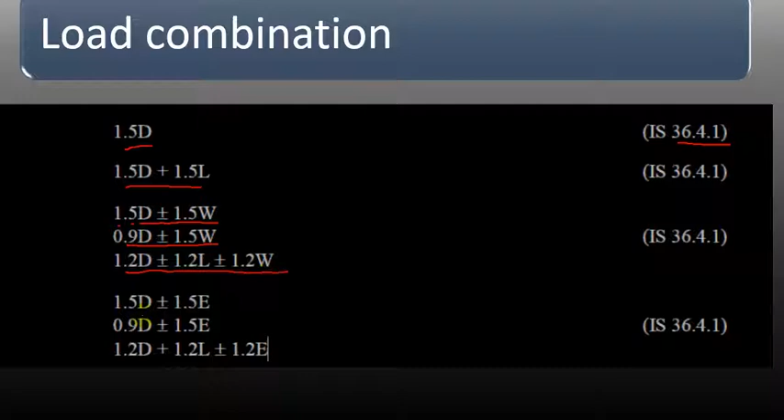Alright, beam design in ETABS. The first thing is you need to know about load combinations, which can be read from clause 36.4.1: 1.5 dead load, 1.5 dead load and live load, dead load and wind load, dead load, live load and wind load. That's all. This is earthquake load, which comes under the seismic part.

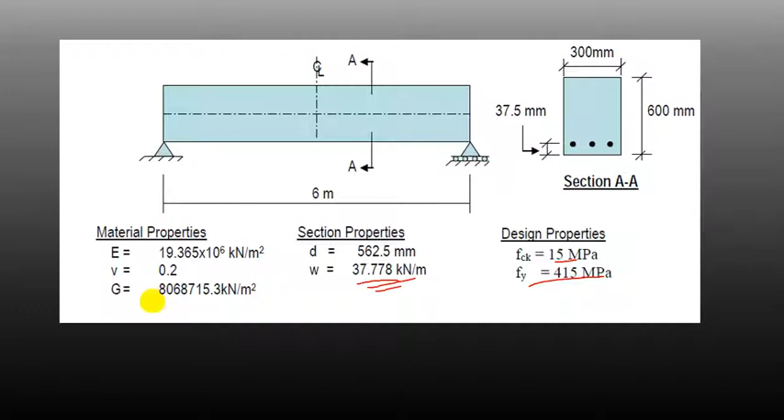Alright, this is our problem. The length of the beam is 6 meters, the section size is 600 by 300. The first thing is we're going to get into ETABS, and the fck is 15 megapascal. The load is 37.77 kilonewton per meter. This is the shear modulus, this is the elastic modulus.

Get into new model. I'm going to pick this option here, and I say that the length is 6 meters, given in the problem. We don't need this grid, but the number 2 will be better. We don't need this thing, but just 2 stories. Don't care about these numbers, okay?

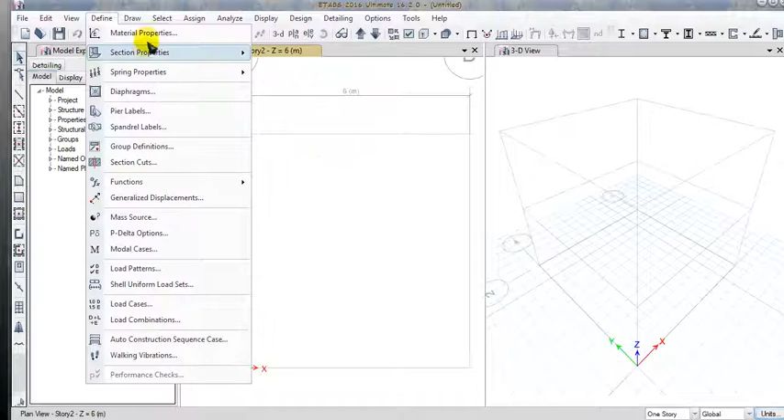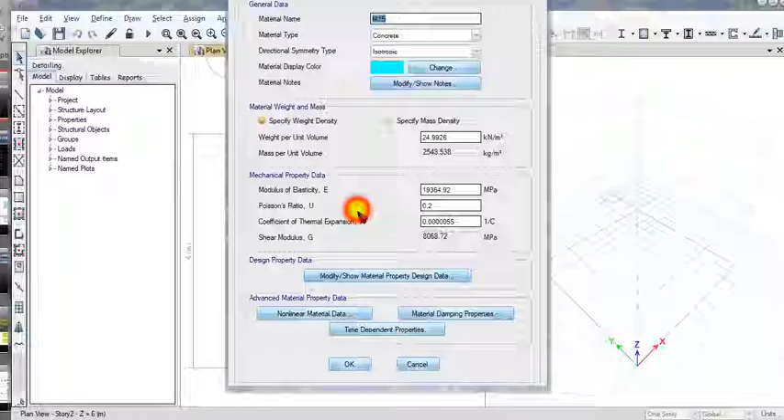The first thing we need to define is the concrete and HYSD. Just get into the state, country, concrete. The grade is M15 based on this problem, and the HYSD is 415. Now the settings should be changed. Just assume that this value is 8068.72. Coming to the slide, 8068, approximately that's correct. Just hit OK, then get into here and make sure that this is 15 megapascal.

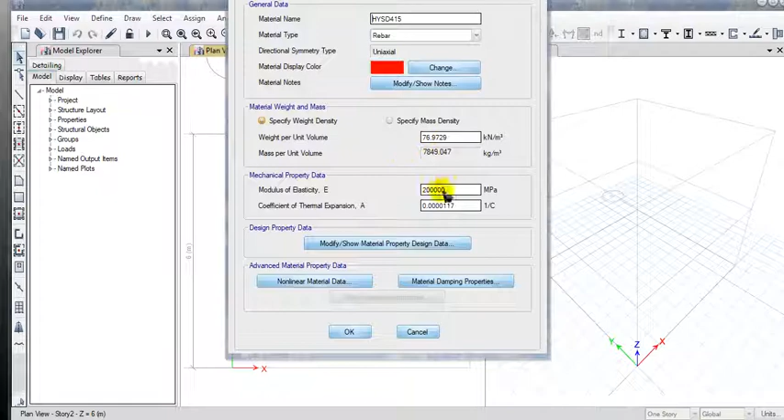And also we need the rebar. Picking up here, rebar grade is 415. The rest of the things I'll leave as they are. Just 415, it's okay.

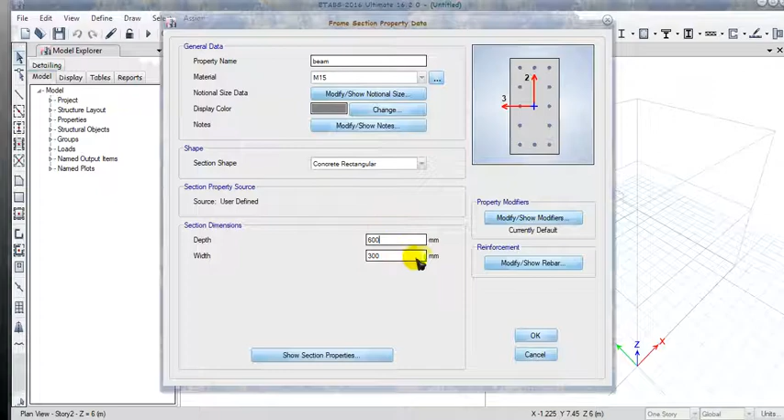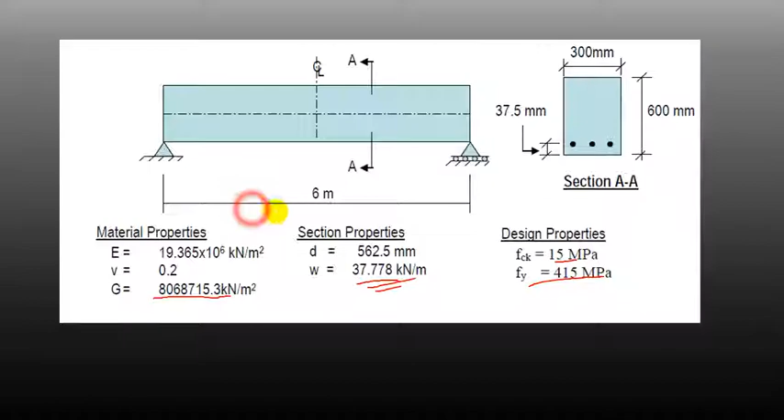Now we need to define a section property, a concrete frame section, and add a new property here. Get into the rectangular section, and this one is a beam. The compressive strength is 15. Now the section size is 600, and I think the width is 300. Rebar modify, and the cover is 37.5, I think. It's right here, 37.5 is the cover. Right here also 37.5 is the cover. That's all, leave it as it is.

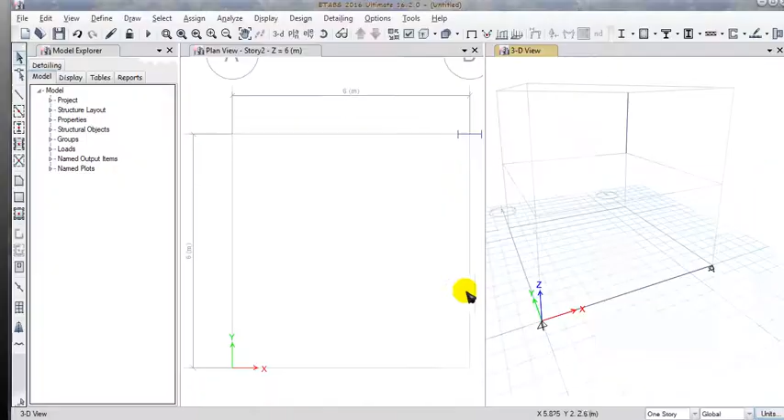Now we got the beam here. Now let's draw that beam. Just click in here. We got a beam right here. Now what I'm going to do is make a combination of 1.1 into ultimate load. So in the ultimate load, I'm going to give this value of the load. I'm not going to care about self weight, or you can come into define and load patterns.

Hold on. I'm not going to add any new load. I'm going to set the self weight multiplier to 0, and I'm going to concentrate only on dead load. I don't need live load here, and I'm going to make a combination on dead load.

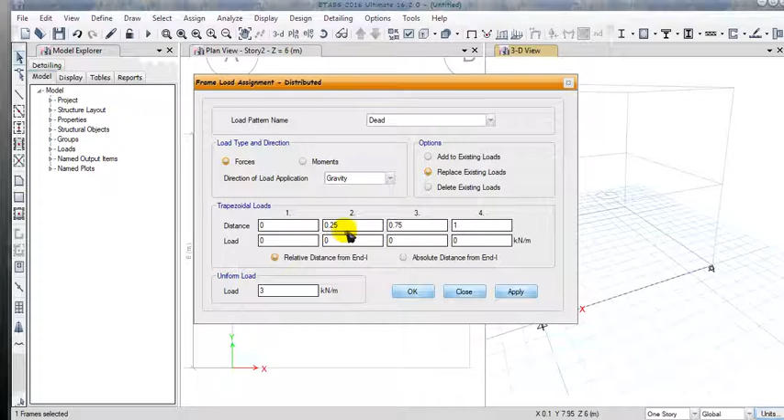In here I'm going to select this beam, and I'm applying a distributed load of 37.778 in the gravity direction. Then let it stay here, and I'm going to create a combination, a dead combination of 1 times dead load. Okay, let it stay here. It's not necessary at all.

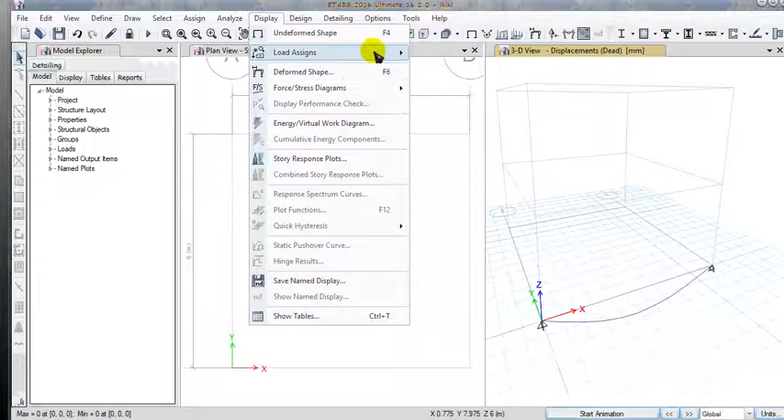Watching the bending moment diagram, sorry, it's right here. No, only this combination is not enough. Okay, the combination is not needed. Let me see, the value comes to be 170.001. Okay, let it stay there.

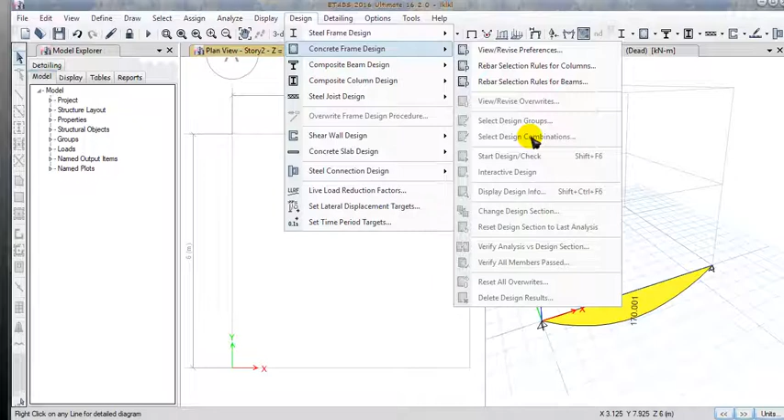Now coming into concrete frame design, you know all these things, right? Well, it's not possible to proceed without it. There's a problem there. We need to have at least a combination to proceed. So coming here. Alright, let it stay there. Analysis. This is crazy.

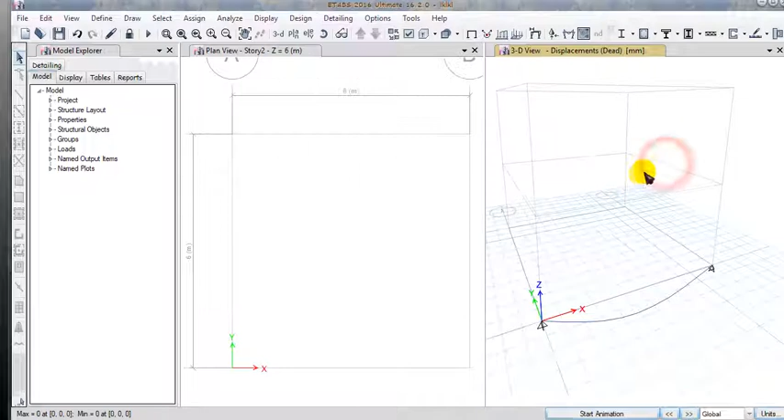What went wrong here? Mainly, the biggest mistake is I didn't pick this up correctly.

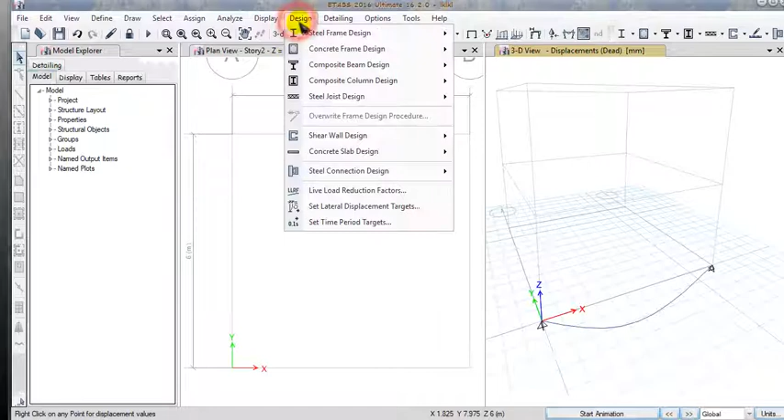As the self-weight is not included, they're not going to show anything. Now let's get into the combination, picking up the combination, and only that combination will be considered concrete frame, and I can start the design and check.

The value is 1006. Just keep it there. Now let's see what is the shear reinforcement right in the way. Here it is, 332. I think you remember these two numbers. Now let's get into the slideshow.

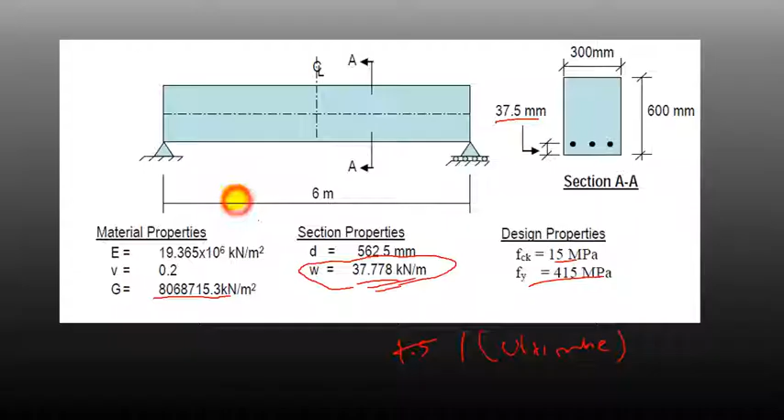You calculate the flexure reinforcement and the shear reinforcement. This number is 1006 and this is 332 or whatever. Okay, finding out the bending moment on that figure, the UDL is

37.778. You can have 37.778 into WL squared by 8. L, you know, L is 6 squared by 8. So you'll get this value.

Now what about the shear force? The shear force is given by WL by 2. Now you have XU by D, that's a constant from the table.

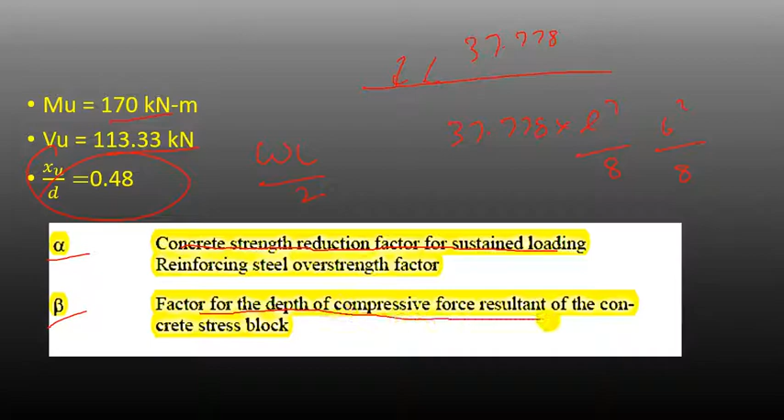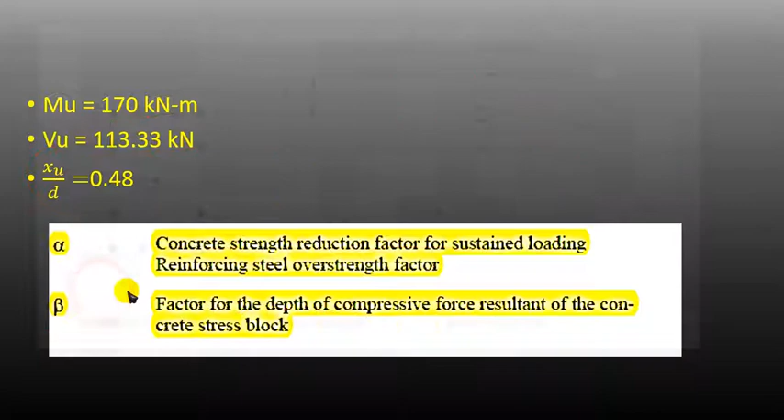Now we need two more constants here. One is alpha and the other is beta. Just know its name is a concrete strength reduction factor for sustained loading, and reinforcement steel over strength factor. Now the factors for depth of compressive force, just know the name, which is not compulsory, but we need to know the values of alpha and beta. Alpha is 0.36 and beta is 0.42.

The first thing we need to find out is M, and M is Mu, that's the ultimate moment by width of the beam into that effective depth D, into 0.36 into 15, that comes to be 0.33166.

Just having an editing right here. This is created by someone else, that's why I'm going to be editing this. Okay, now we have... where's the pen?

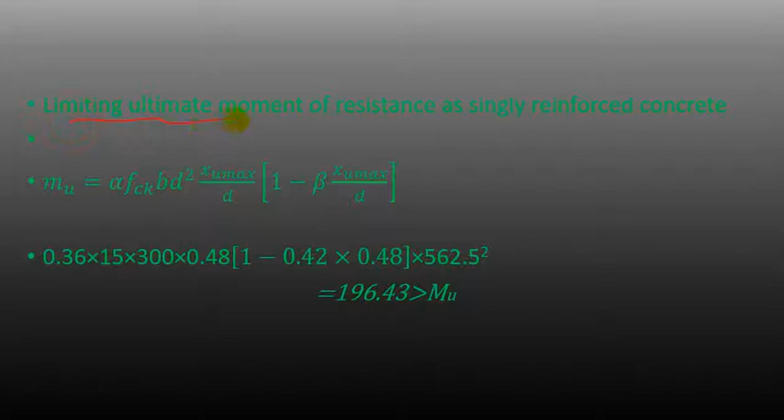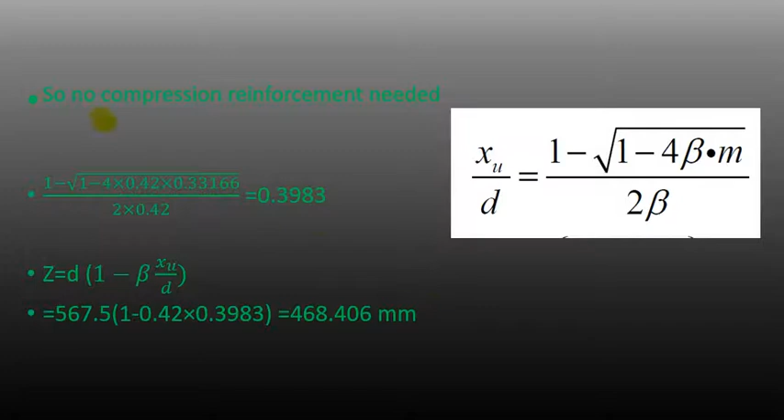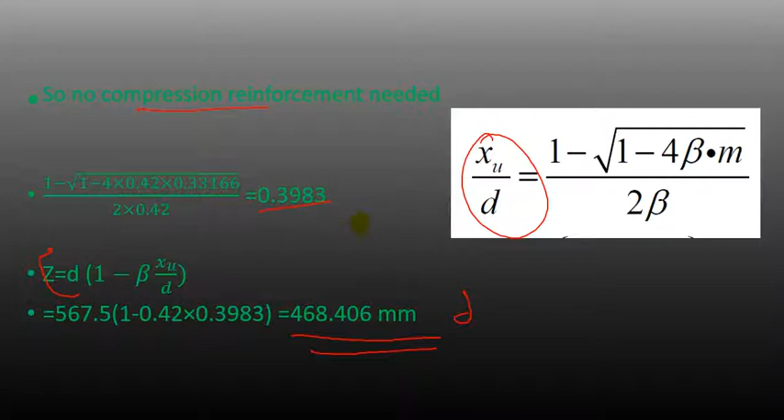Now the depth, Z, is equal to D, and that will give you the depth, small d. That's the Z factor, I don't know its name. So by using Z, we can find out the area of steel, which is equal to the area of flexure reinforcement.

Now coming back to shear design, we have tau V equal to VU by BD, and tau max is 2.5 for M15 concrete. That's coming up right away in here.

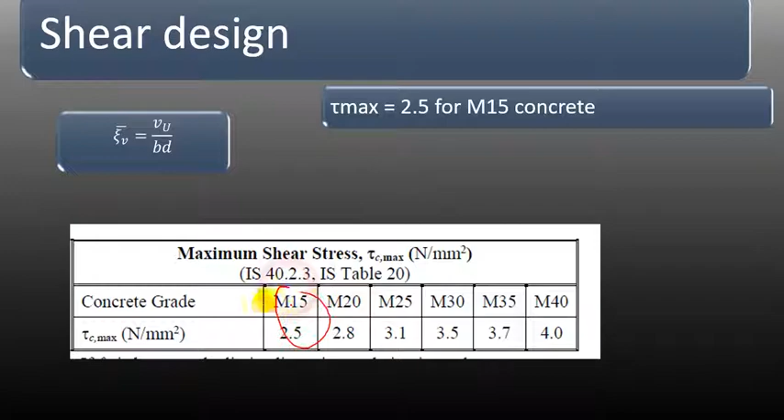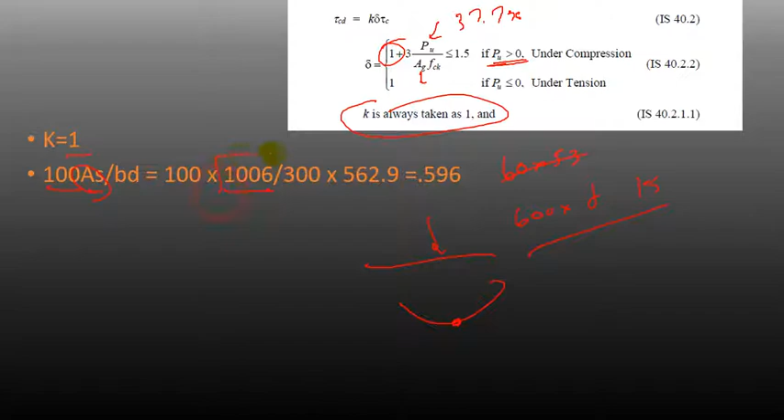That value comes to be 1. Now 100 AS is what you got right here, that is the area of steel into BD. That comes to be 0.596. So 0.596 comes right away in here, so this could be interpolated too, and you'll get the value as 0.49.

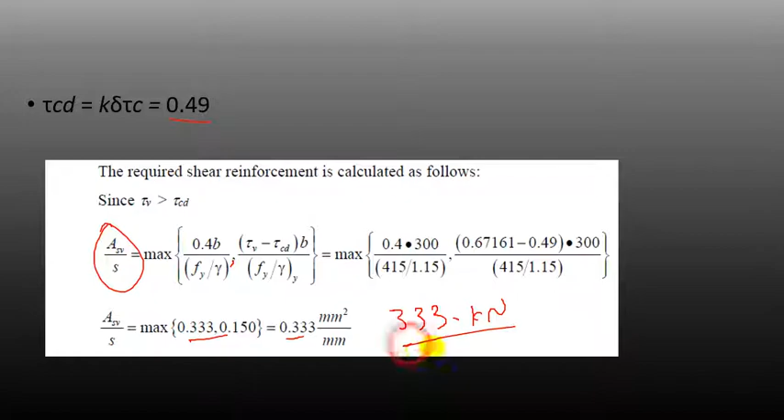Now you can have Asv/s as the maximum of two values: 0.333, that is equal to 333 kilonewton. That's it. Is this correct?

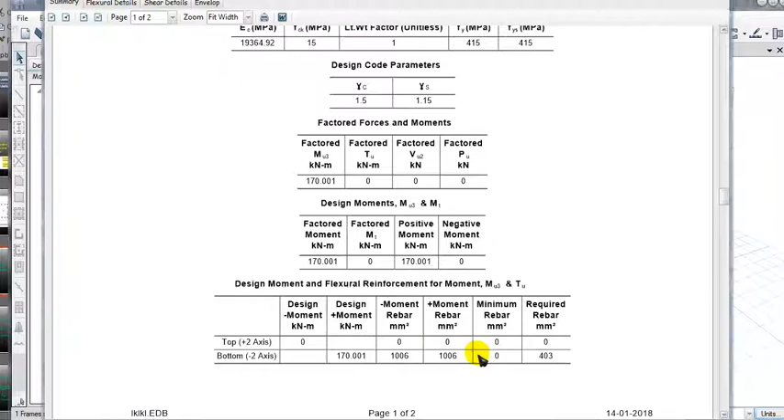Selecting the frame and right clicking, it is 3. This is ASV. So just coming into summary, you can find... that's enough. That's all about it, this is enough.